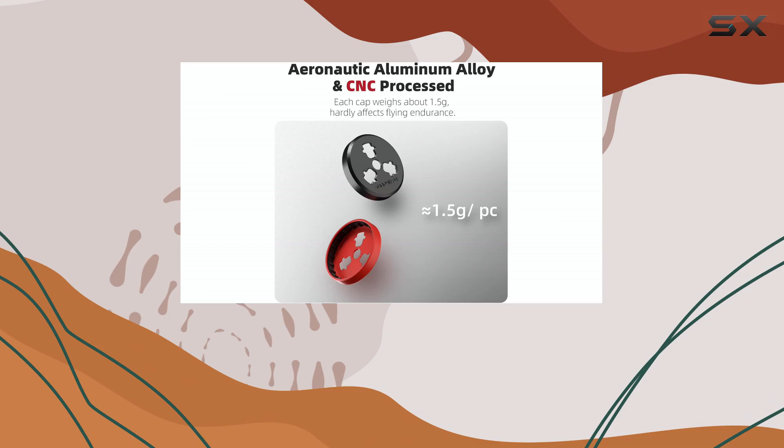Today we're taking a look at a simple yet potentially very useful accessory for several popular DJI drones: these aluminum alloy motor caps designed for the Air 3S, Air 3, and the entire Mavic 3 series, including the Pro, Classic, and the original Mavic 3.

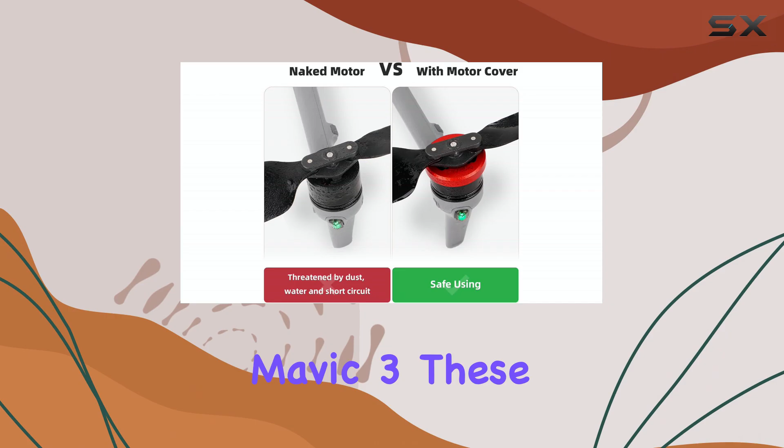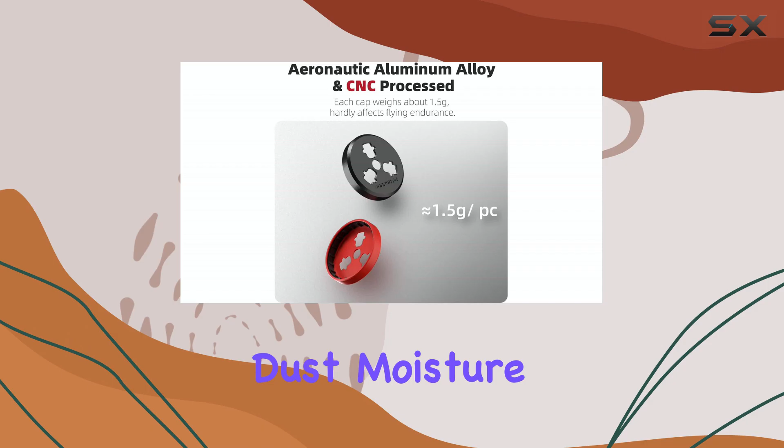These aren't just decorative pieces. Their main job is to protect the exposed motors on your drone. The motors are critical components, and keeping them clean and safe is important for the drone's longevity and performance. These caps offer protection against dust, moisture, splashes, and even minor bumps that could potentially damage the motor housing or get debris inside. What's interesting is the material they're made from.

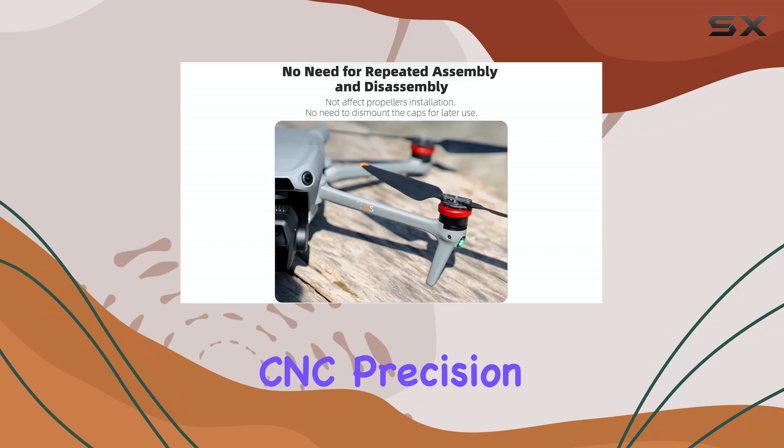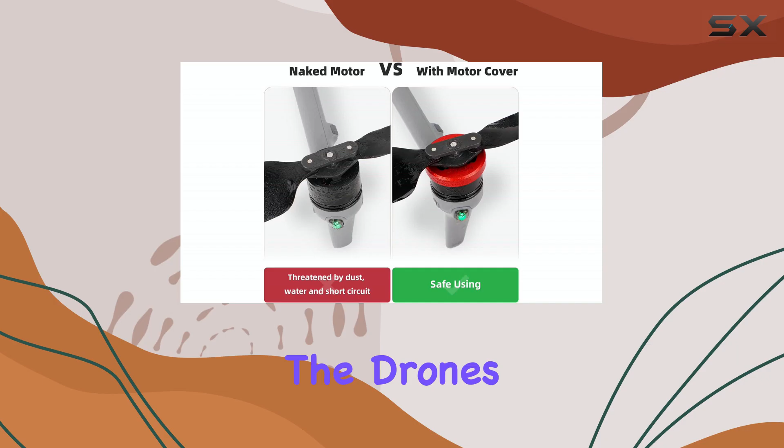It's an ultralight aviation-grade aluminum alloy, finished with CNC precision. This material choice is smart for a few reasons. Firstly, being aluminum, each cap weighs only about 1.5 grams. That's incredibly light, and, as the manufacturer points out, it hardly affects the drone's overall weight or flight range, which is always a concern with accessories.

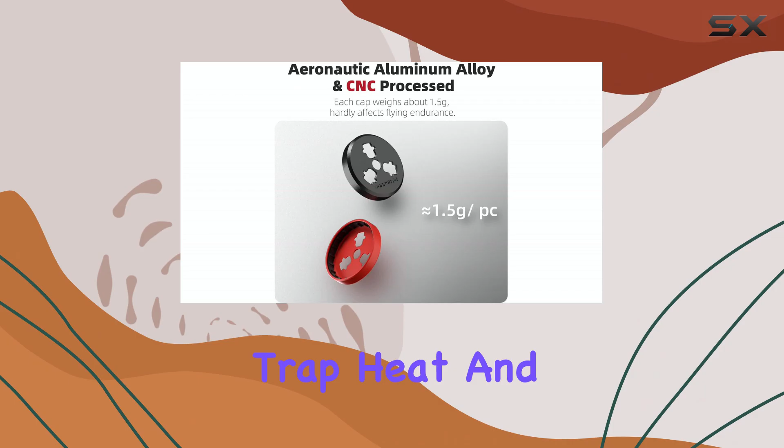Secondly, aluminum is known for its good thermal conductivity. This is crucial because drone motors generate heat during flight. The caps are designed so they won't trap heat and negatively impact the motor's ability to cool down, ensuring performance isn't compromised.

One of the best features mentioned is that these caps do not interfere with the installation or removal of the propellers. This is a huge convenience. You can leave them on the motors permanently, providing constant protection without the hassle of having to remove and reattach them every time you want to change or store your propellers.

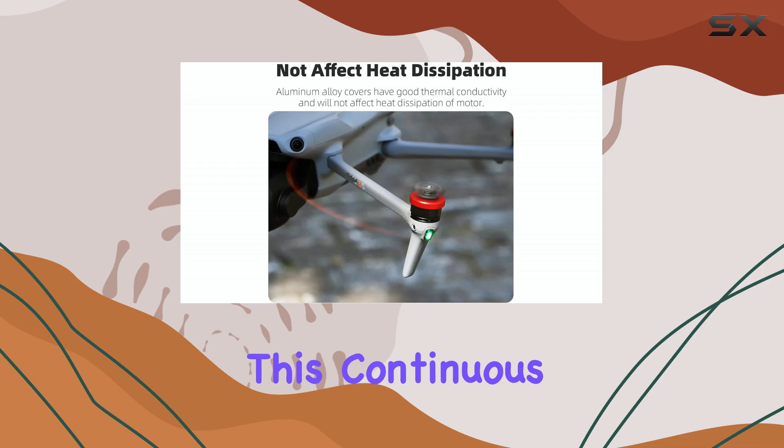This continuous protection means the motors are always shielded from the elements and potential physical damage when the drone is in storage, transport, or even during pre-flight setup.

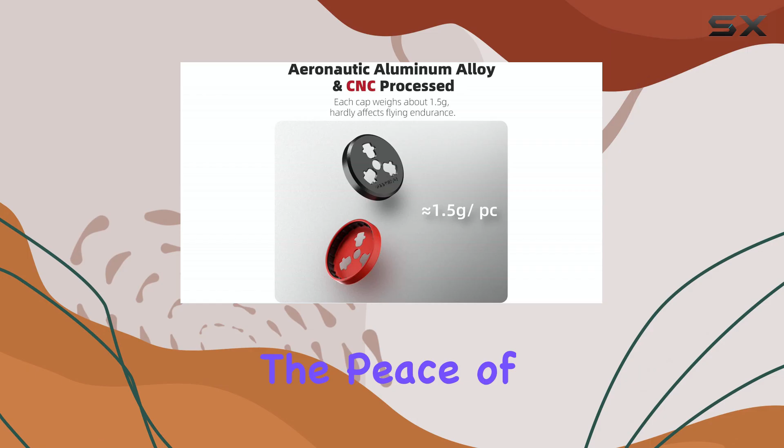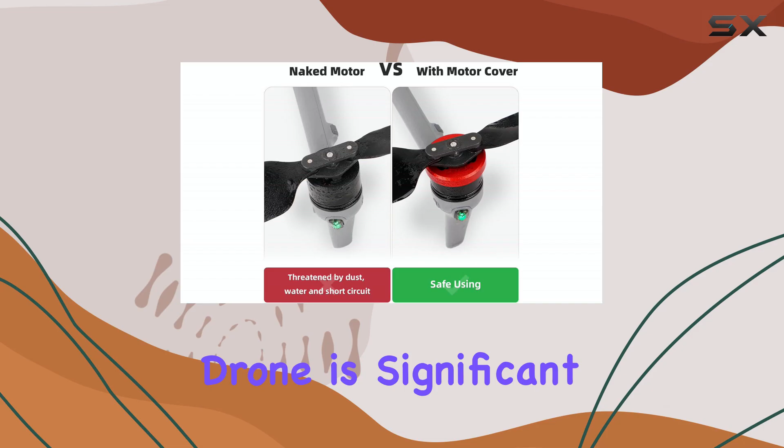The black finish on the aluminum gives them a sleek look that matches the aesthetic of the DJI drones they are designed for. While they might seem like a small addition, the peace of mind knowing your motors are protected from common environmental hazards like dust and moisture, especially when flying in less than ideal conditions or storing the drone, is significant. Prolonging the life of the motors ultimately helps maintain the drone's performance and reliability over time.

For owners of the compatible DJI models, these aluminum alloy motor caps appear to be a practical and lightweight solution for essential motor protection.